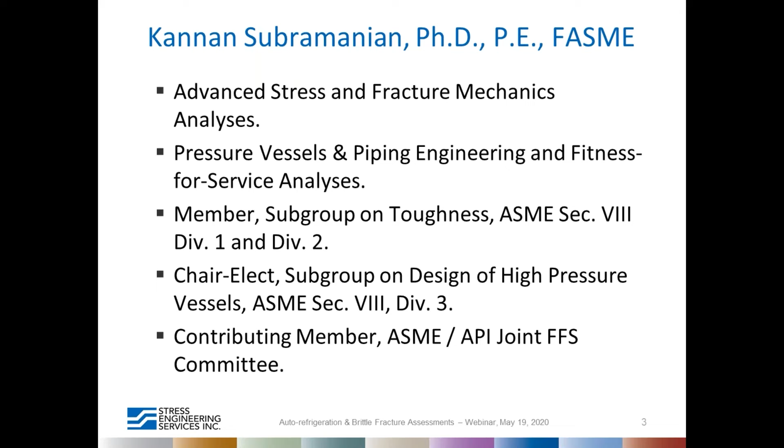Just about me, I have over 17 years of industry experience in various roles as inspector, piping design engineer, and stress analyst, fracture mechanics analyst, and do a lot of pressure vessel design and piping design, fitness for service analysis.

Just a disclaimer here, I will talk about the code aspects at some level in this webinar, but all of those should be taken as my opinion and not as an opinion of ASME or Stress Engineering Services.

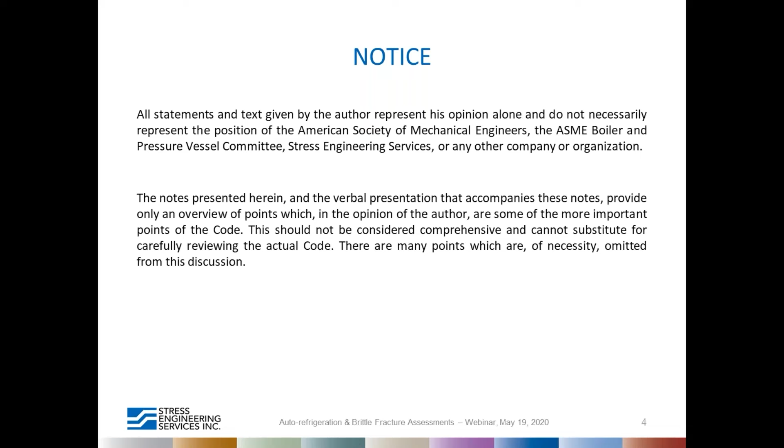So the outline for the presentation today is basically we're going to talk about some of the nomenclature and how does the auto-refrigeration affect the industry, with some examples of events, and briefly discuss the brittle fracture basics and the parameter that has been used quite a bit to characterize the fracture resistance.

And we'll also delve into the details of the code aspects of brittle fracture prevention and how post-construction codes address brittle fracture prevention.

There's one important term that is essential to this discussion, which is the critical exposure temperature, which goes along with the process hazard analysis. We'll discuss that briefly. I wouldn't be touching a lot of details on PHA today because that's a whole new topic that has to be discussed separately.

We'll talk about some example scenarios and we'll go through some example brittle fracture assessments that will be beneficial to the audience. We'll have some closing remarks at the end.

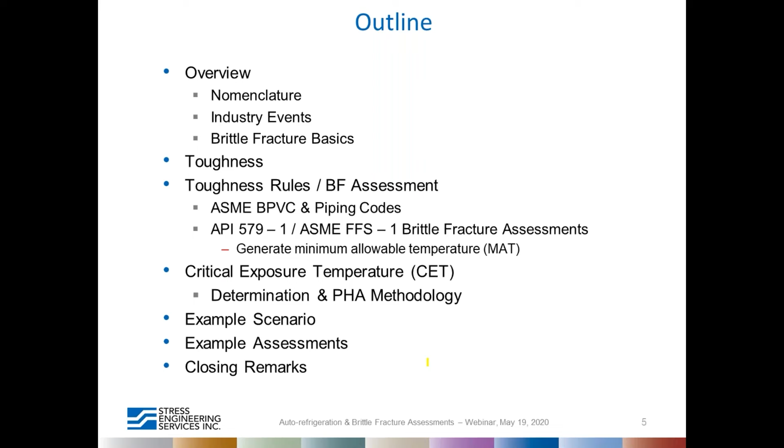So first things first, nomenclature. What is auto-refrigeration? These are all things that get encompassed in what's called the Joule-Thomson effect, which is essentially an adiabatic expansion. In proper terms, auto-refrigeration is the unintentional and uncontrolled phase change from liquid to vapor of a hydrocarbon that results in refrigeration.

This is the refrigeration which, when you don't want it, you get it, and you get it when you least expect it and when you're not controlling it.

Brittle fracture is the sudden and often catastrophic fracture of a material with little or no plastic deformation. Relatively low levels of energy are required to initiate or propagate a flaw.

In a sense, for all brittle fracture assessments, the initiation is assumed to be complete. That is, there's always an assumption that a flaw is present.

And also, brittle fracture is a rapid crack propagation phenomenon through the material and will result in leak. And the leak can result in explosion if there is a hydrocarbon involved, a flammable hydrocarbon involved, and a source of ignition.

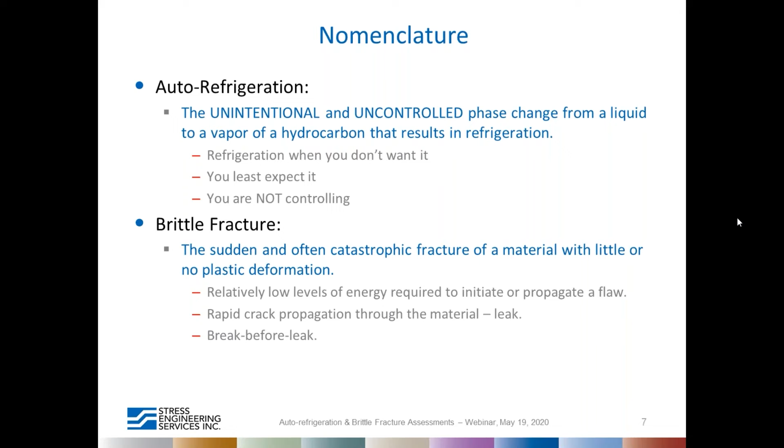This is unlike the other mechanism, which is leak before break. It's the opposite here, break before leak. In some materials, the crack speed approaches the speed of sound of the material, so you can imagine how fast the fracture can be.

Critical exposure temperature is defined widely across various standards, but it is the lowest temperature experienced by a piece of equipment as a result of auto-refrigeration, Joule-Thomson effect, or exposure to cold liquid that it's not designed for exposure to. Low ambient temperature can also be considered a critical exposure temperature in certain scenarios.

Minimum allowable temperature is the lowest temperature allowed at a coincident pressure to ensure the vessel remains ductile. We'll talk about brittle and ductile in a little bit.

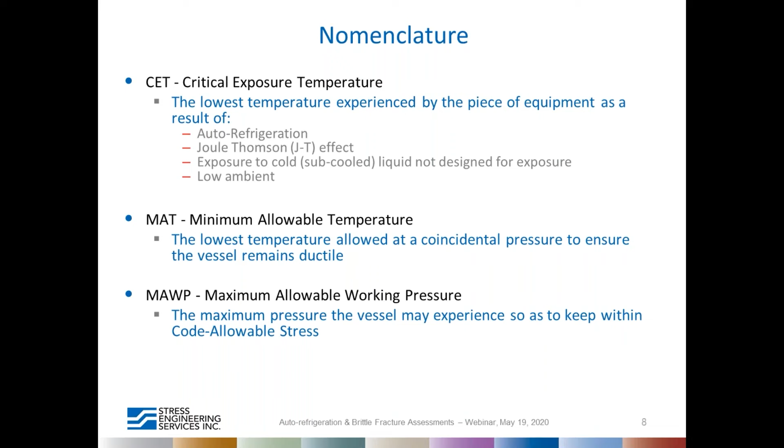MAWP, most of you know, is the maximum allowable working pressure. It's based on code allowable stresses.

Minimum design metal temperature, or MDMT, is a code-specified value developed by owner, or a value determined as part of code design. For example, if you go to ASME Section 8 Division 1, UCS 66 rules would apply unless UG 20 rules apply.

It also equals the MAT at the MAWP, the lowest temperature allowed at MAWP to ensure the vessel remains ductile.

Post-weld heat treatment, everybody knows about this. This is to reduce the residual stresses.

Minimum pressurization temperature is often used by reliability personnel to look at the manageable envelope, the safe operating envelope. The other item related to MPT is MSOT, minimum safe operating temperature. We'll discuss this in later slides.

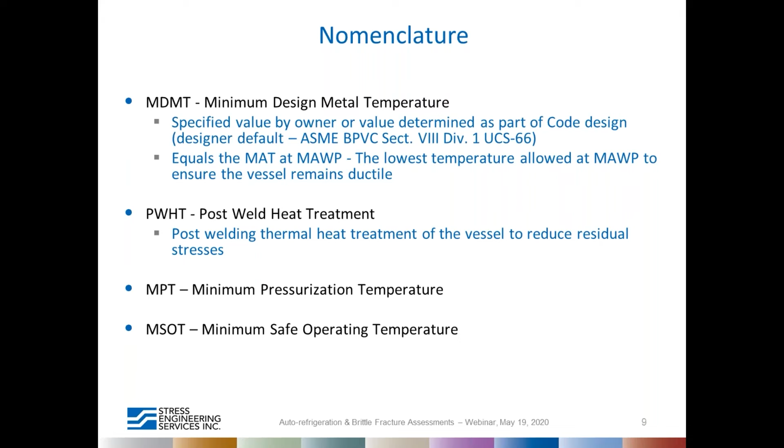I would like to get into the industry events that emphasize the importance of auto-refrigeration and brittle fracture. One of the major incidents is the Morris exchanger failure that involved 2 people getting killed, 7 burned, and 5 disabled. We'll talk about that in detail.

And the other incident is the Lake Charles flare drum failure. Fortunately, this did not result in any injuries. Longford exchanger failure is another major one. In addition to people getting killed, it had a huge economic impact. Beringen is in Belgium.

It's a HDPE plant that had a failure in 1998, and this is at a flange. This issue is still being discussed widely across the industry because of the nature of the material that caused this failure. Many of the flanges supplied since, for over a decade or more, have issues with regard to toughness. So this one was the first incident to that effect that is widely known.

Westlake flare piping, we'll talk about that too later in this presentation. And then there are numerous other hydrotest-based brittle fractures that occur every year. As I mentioned, some of these will be discussed at some length.

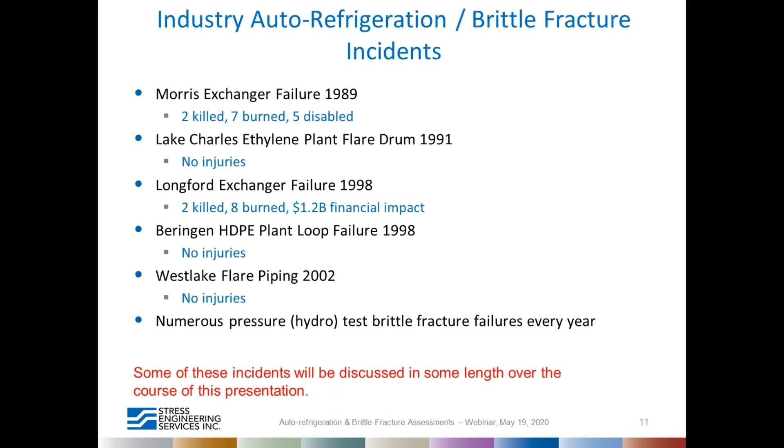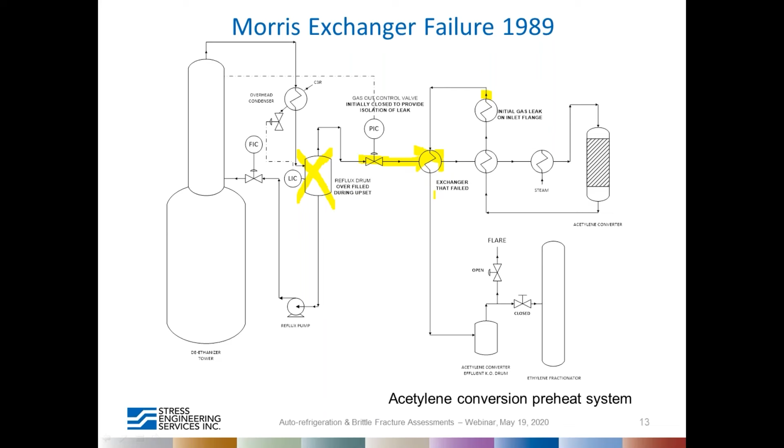So when the plant started back up, the pressure increased, and the low temperature of the material induced brittleness, and the high pressure resulted in this explosive failure. So this was the remains of that particular heat exchanger.

So once again, to emphasize the incidents, it never occurs during normal operation. So we call that an excursion. Normally those are not the things that are designed for, although the code has evolved to address some of those unconsidered cases in the design in recent days.

A process upset of some sort is often the initiator for all these events. Subsequent actions by operators can also cause the chain of events to progress to a much higher consequence. The risk of brittle fracture is transitory, with potential only occurring within a window of vulnerability. Often this window passes without notice. Doing the wrong thing during the vulnerability window can be catastrophic.

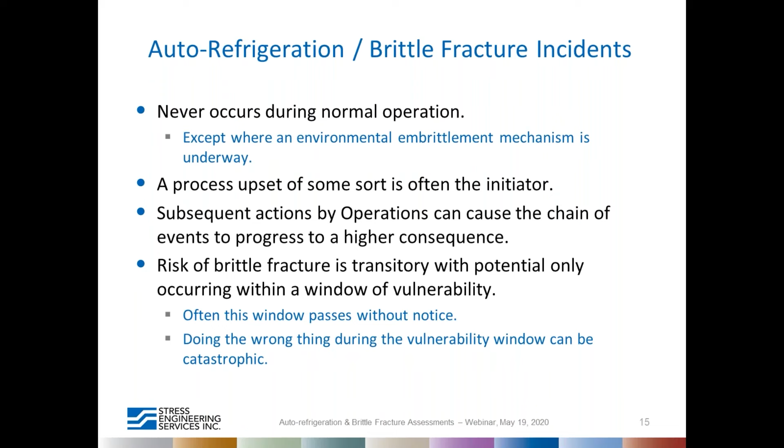Let's talk about some brittle fracture basics. Brittle fracture can be characterized just like in the case of a fire triangle, with a triangle. Some authors prefer to use a quadrilateral. However, these are the three initiators, or the three sides of this element.

One is the crack, or the presence of a notch, and a sufficiently applied stress. Usually the code varies in terms of, as you look through the codes, the number varies from 6 KSI through 8 KSI, which is considered the primary stress that would cause a brittle fracture. So if you operate below that stress, then you're not closing this side of the triangle, because typically the presence of a crack or notch is always considered as present.

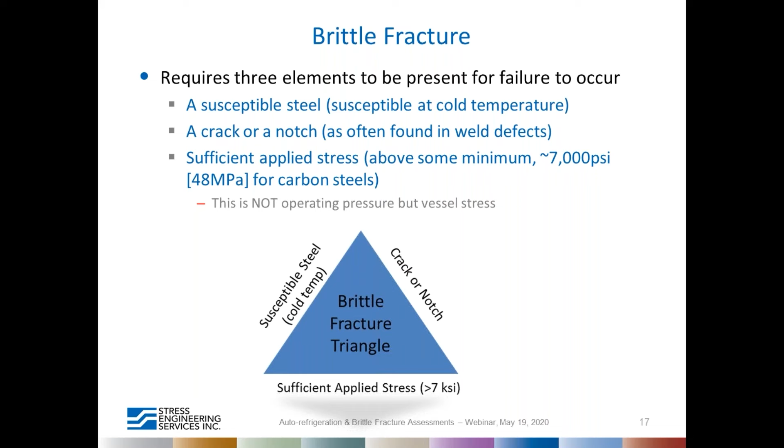The susceptible steel, this is where the material behavior comes into picture, whether the material behaves brittle or ductile. We'll go into that in a little bit. So the same material can behave ductile at a higher temperature and can behave in a brittle manner at a lower temperature.

So this is a curve they call the toughness versus ductility transition curve. This particular location on this curve is referred to as the nil ductility temperature location. This plot is between what's called fracture toughness, which is a measure of absorbed energy in fracture, versus the temperature. As you can see, a material can go to a brittle phase if the temperature goes lower. Brittle materials almost exhibit no energy absorption during the propagation of a crack, but the ductile materials...

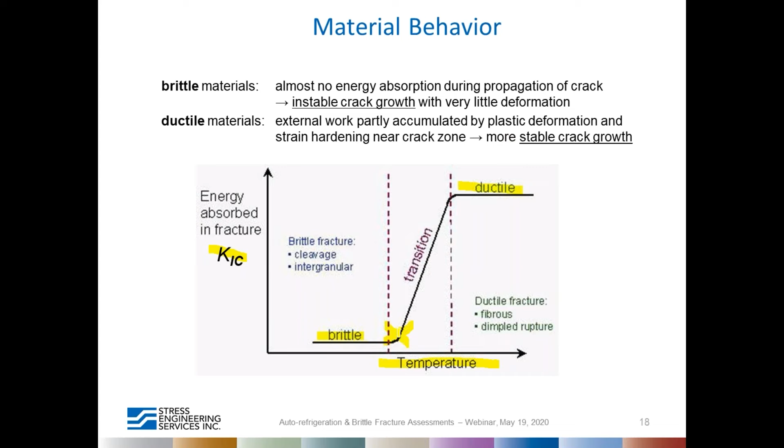When external work is applied, it gets partly accumulated by plastic deformation or strain hardening. So there's more stable crack growth in those cases. Every time a material gets cold, especially carbon steels, it is of concern because of this behavior.

So what is toughness? Depending on the level of academic interest, it can be defined in various ways. In general, it represents the resistance of fracture and is measured by the absorbed energy up to the fracture. Fracture toughness, for most fracture mechanics analysis involving single parameter crack driving, is a property indicative of a material's resistance to fracture when a crack is present.

However, there is another parameter that's being widely considered and researched over several decades. It's called T-stress, which addresses the constraint effect. We're not going to talk about that, although the codes are addressing that at this time.

Typically, this fracture toughness is represented by the term K1C. There are K2Cs and K3Cs. We're not interested in that for this discussion because this mode of failure is the most common mode of failure. Also, this fracture toughness is determined by using the following tests, primarily in the order of their expense.

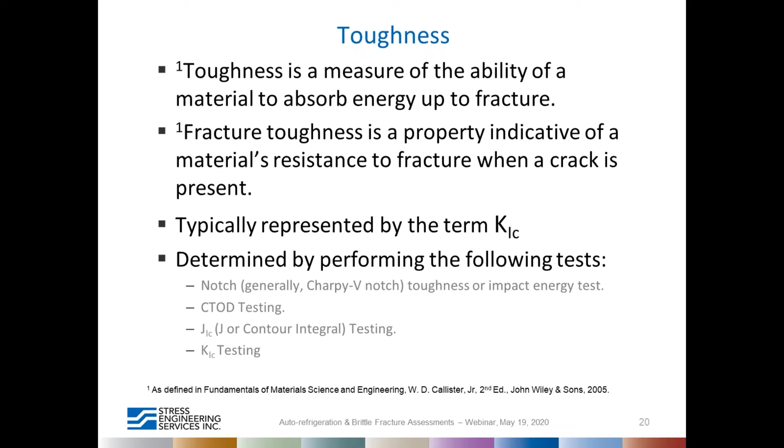The cheaper test is the notch toughness test, the typical one being Charpy V-notch. It is not a direct measure of toughness, although there are correlations that exist that give a clear indication of where the toughness is. There is CTOD testing, also known as crack tip opening displacement testing, and then J1C testing and K1C testing.

We have to also look at the effect of thickness when considering the fracture toughness. For many years, the thickness effect was not considered in the codes. If you look at this graph, we know that the nil ductility temperature, or the brittle to ductile transition temperature, is somewhere here. For a common thin section carbon steel material, that transition temperature is about -20 degrees Fahrenheit. Although for the same material, if the thickness is higher, the curve gets shifted to a warmer temperature. This is one of the reasons why many failures were noticed in thicker sections, and also the primary reason why in high pressure vessel designs, the fracture mechanics approach is involved.

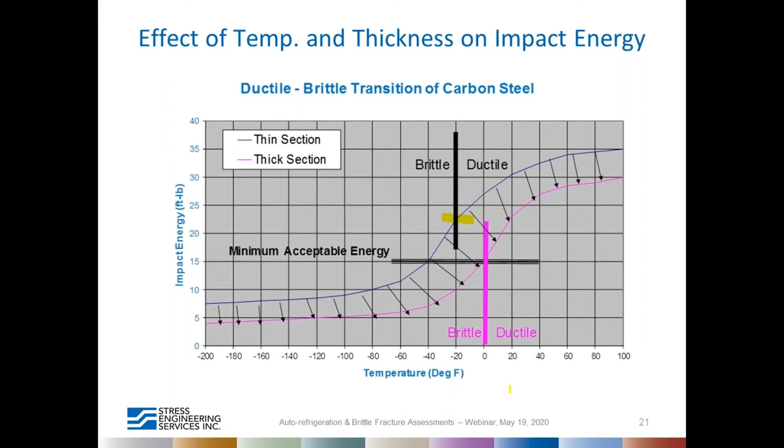In 1981, the Section 8 group formed a task group to address the effect of thickness, which eventually resulted in the current exemption curves involving the function of thickness. Those were implemented in 1987 in the code.

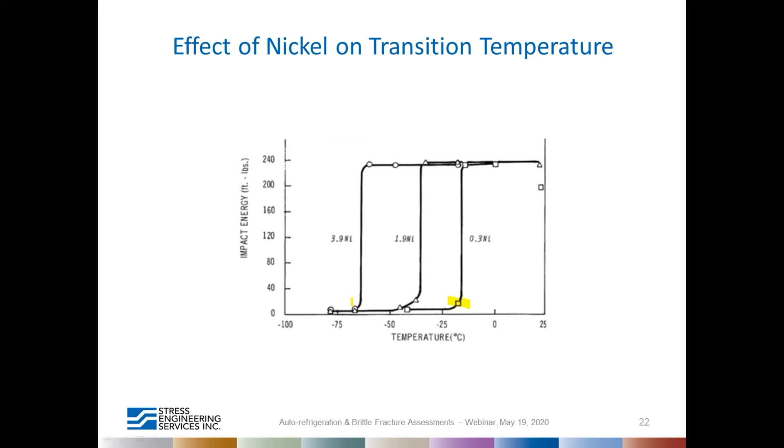Let's look at the effect of nickel on the transition temperature. We know that the nil ductility temperature is somewhere here, and you can see that the addition of nickel certainly helps in reducing that nil ductility temperature as we go higher in nickel content.

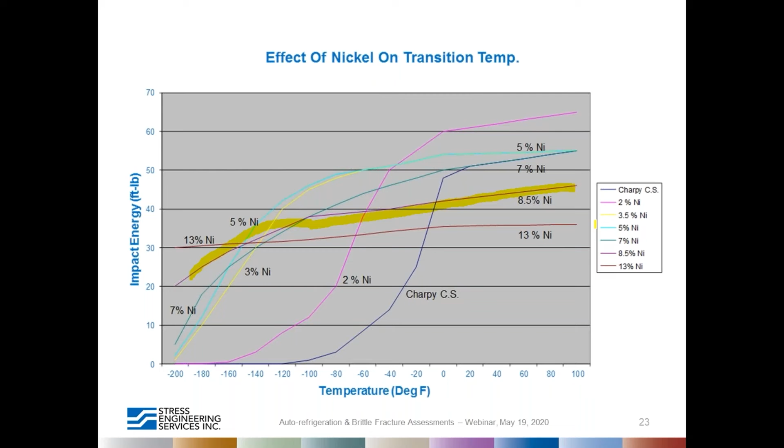Let's look at the processes that are subject to potential auto-refrigeration and brittle fracture. The plants that need to consider this are primarily the olefin plants, gas processing plants, refineries, polymer units, ammonia units, and any light liquid processing units that process C4 to C1 liquids. The primary mechanism here is adiabatic expansion, so topside gas processing also needs to consider this.

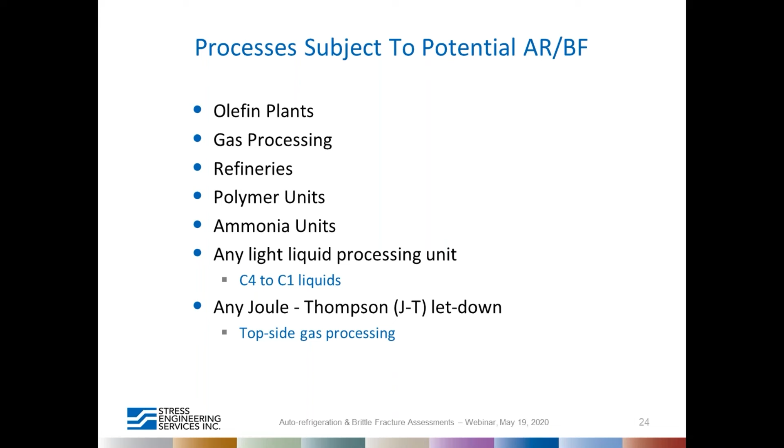So how does the ARBF prevention program elements look like? You have to form a team, then identify the vessels that may be subject to auto-refrigeration, and then execute a brittle fracture analysis, which basically involves developing a MAT curve. Then you can take either the process approach, as shown on the left-hand side, or go to the PHA study that involves developing more accurate CET calculations, then look at the risks involved, and track action items in the PHA tracking system.

So for the most part, we're going to address in this presentation only up to this portion. We're not going to look into these other portions because of the time limitations we have for this webinar.

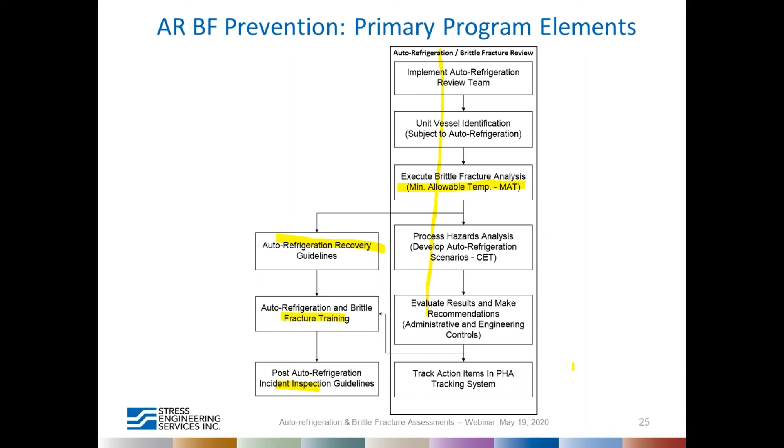So what do the toughness rules or brittle fracture prevention rules say, or where do you find them in the codes? The fracture toughness rules in various codes are given below. In the case of Section 8 Division 1 pressure vessels, it is given under UCS 66. Article M2 if you were to use a previous edition of Div 2, and Section 3.11 in Div 2 in the 2007 edition and later editions.

By the way, 2007 is the major rewrite edition for Division 2. Section 323 of B31.3 also covers the toughness rules. There are only minor differences between Section 8 Div 1 and B31.3 rules. For the most part, they're the same.

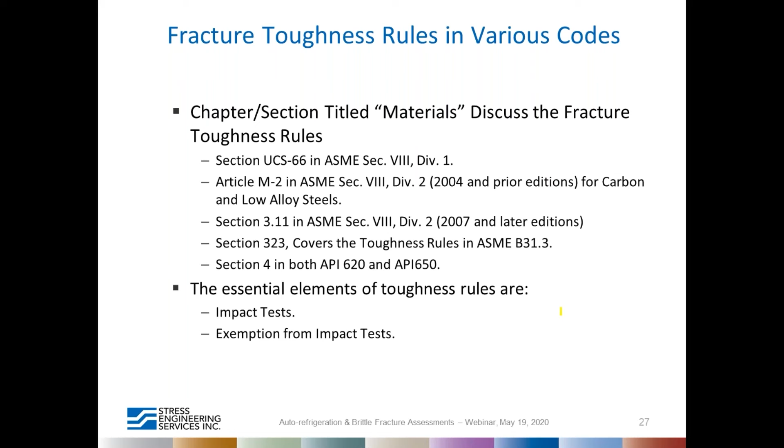Section 4 in both API 620 and 650 storage tank codes. Typically, the storage tank brittle fracture or fracture toughness rules are more stringent than the other code rules. Essential elements of toughness rules are either mandating impact tests or an exemption from the impact test. If you were to impact test something, then you can confidently place them in service for that particular service. However, for exemption from impact tests, you refer to these exemption curves provided in the code, which we will address later.

For post-construction purposes, for vessels or piping that are already in service, we have post-construction codes such as API 579, specifically Part 3 or Section 3 of that standard, which addresses brittle fracture prevention. Note that brittle fracture can be prevented - that's basically how fitness for service addresses this particular damage mechanism. Unlike other damage mechanisms, a brittle fracture event will make or break.

In this process, we generate a MAT curve, and it involves every component assessment in the pressure vessel or the piping. We're going to talk more about Method 2A in this presentation. MAT results are also used to compare against the PHA-developed CETs, and that's how we determine whether a vessel is at risk or not.

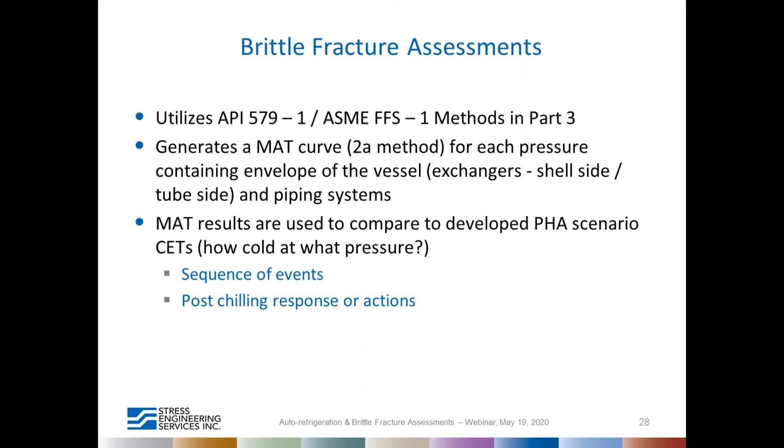Once again, API 579 flowchart of assessment. There are 3 levels of assessment; 2 levels are shown here. In order of complexity, Level 1 involves either impact test or the exemption of it. Level 2 has 3 particular components or equipment in the assessment: pressure vessels, piping systems, and storage tanks. Method A involves developing a safe pressure-temperature envelope. Method B involves hydrotest-based assessments. Method C is basically a proof test, or a flowchart-based method.

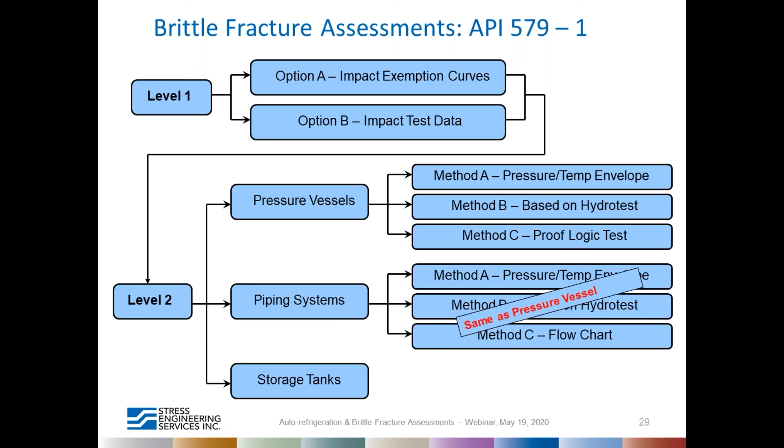So in more detail, level 2 methods involve method A, which has 3 options. You can use either one of them alternatively. Method A involves some level of stress analysis, either using hand calculations for pressure vessels or using complex Caesar models, or piping stress analysis software for piping.

Method B, as I mentioned, is based on hydrotest. Method C is using a flowchart. For piping systems, a simplified flowchart is given on the right-hand side. It goes through a logical process, and you determine whether you're at risk or not. The major modification that came in this flowchart was in 2016, when the CET was lowered to -20 degrees Fahrenheit based on industry experience.

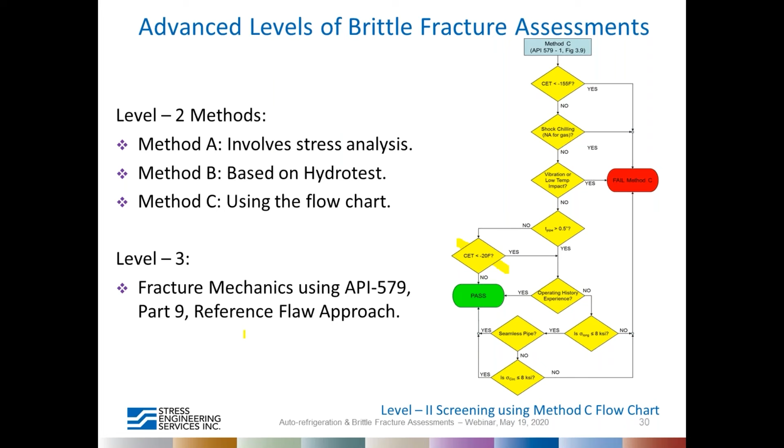Level 3 is based on fracture mechanics-based approaches and typically involves another section of API 579 using the reference flaw approach. Currently, the code or standard uses a quarter-T reference flaw, T being the thickness of the component being assessed. It might change in the future.

And further reduction in MAT. The MAT we talk about here is the MAT that is developed either based on impact test or exemption curves. We'll get to the exemption curves in a bit, but that MAT can be reduced further for taking credit for operating at a lower stress.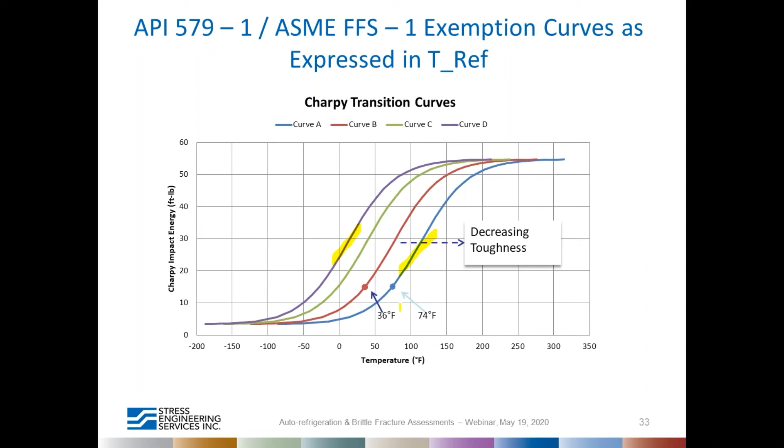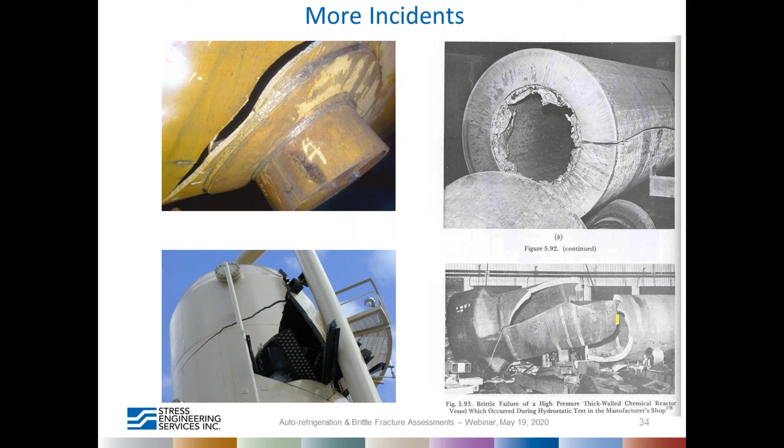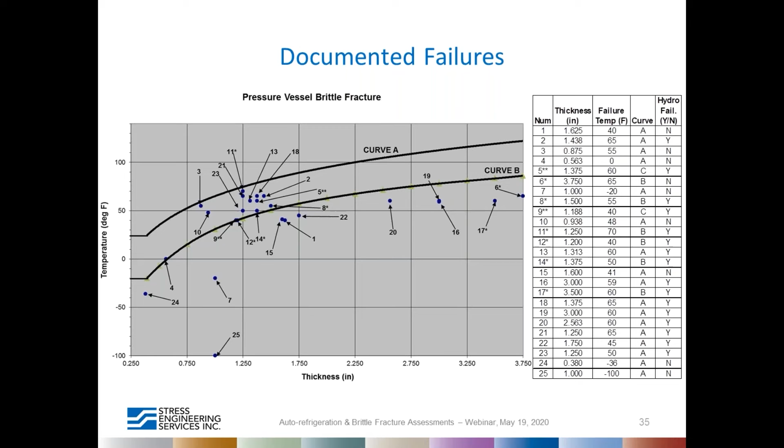So basically, most of the failures that are still happening are in hydrotest. Let's go into the details of the MAT curve.

So what is a MAT curve? If you were to do a simple post-construction brittle fracture assessment for an excursion event at a particular pressure and temperature, the MAT is a single value. However, if the pressure varies and you want to consider the risk involved for a particular pressure vessel operating at various pressures and handling a particular olefin, then you need a MAT curve.

On this graph, the blue line shows the MAT curve and the red line shows the flash curve, or CET curve, of the hydrocarbon or olefin. The flash curve indicates that if you're below it, you're in the liquid phase, and if above it, you're in the gaseous phase. If the MAT curve falls below this curve, you're inherently safe to operate, meaning failure is not predicted. This is for one particular example of a material, wall thickness, and pressure considered, with propane as the olefin for this example.

Just to recap how this is developed: you do the stress ratio calculation at each pressure, and then you do the temperature reduction at each stress ratio, and plot and develop this plot of minimum allowable temperature.

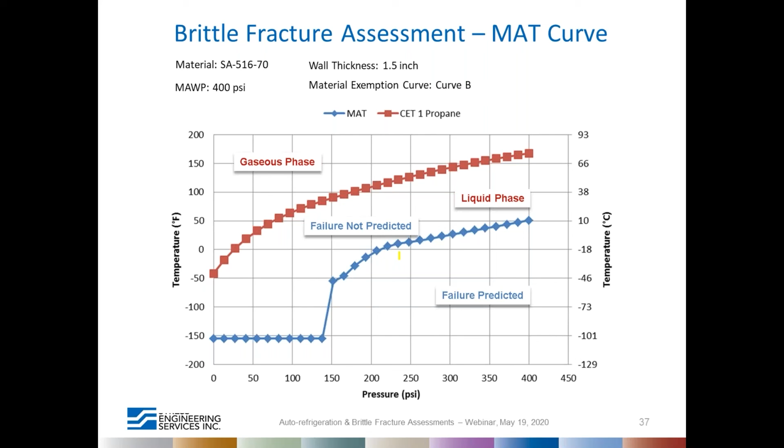So one example would be looking at this. How is it applicable to the industry? For example, this MAT curve is plotted for one particular vessel that's operating at 180 psi at 90 degrees Fahrenheit, and the operating medium here is propylene.

If you look at the flash curve, which is above the MAT curve in this case, let's consider one scenario, a one-step auto-refrigeration. You operate at a normal operation pressure, depressurize it, and then repressurize it at this pressure. The metal temperature remains the same, so as the pressure increases, you're increasing the risk of brittle fracture. However, while the MAT curve is still below this horizontal line, the risk is minimized.

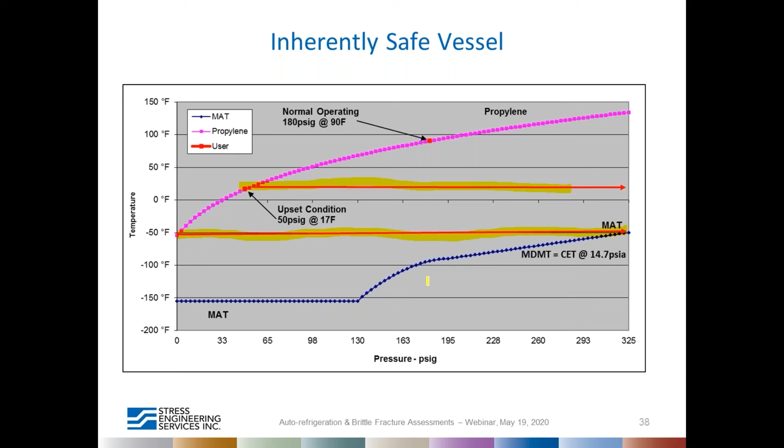In the other scenario, where you go all the way and de-inventory, the pressure goes all the way to zero, and then you restart, the metal temperature is very low at this point, and yet if you repressurize it, you're still above the MAT curve. So this is an inherently safe vessel, and this is how you would do a process safety or process hazard analysis. Let's look at another vessel.

In this case, the medium is propylene. Once again, the operating pressure is 180 psi and the temperature is 90 Fahrenheit. And the MAT curve is a little different than the previous one, so this is a different vessel.

Once again, if you're operating at this pressure and temperature, you're safe. And when you go along the flash curve and then come back and want to restart, once again you're safe if it is rapid, without returning to equilibrium.

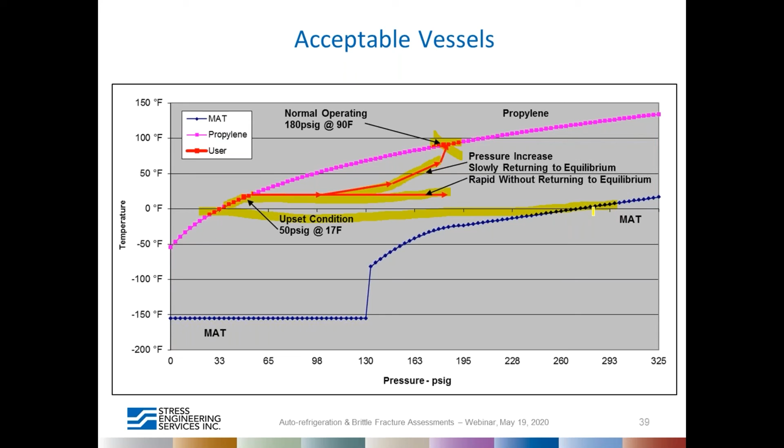Our typical process restarts would involve a slowly returning to equilibrium scenario, and the process should place controls to consider these upset conditions, because if you go below 17 degrees Fahrenheit on this curve, and then come back, you would intersect this MAT curve, which will put this vessel at risk.

So critical exposure temperature, this is very essential to determine accurately. It is determined based on startup, which can be the lowest one-day mean ambient temperature, normal operation temperature, shutdown, or any other upsets, or standby when not in operation. And it can be from hydro test as well, and also auto-refrigeration and other Joule-Thomson cooling mechanisms.

Shock chilling is another one, when you introduce cold fluid into the system to cool the system faster to restart. And these are determined using PHA, which is the process hazard analysis, or other comparable assessment methodologies.

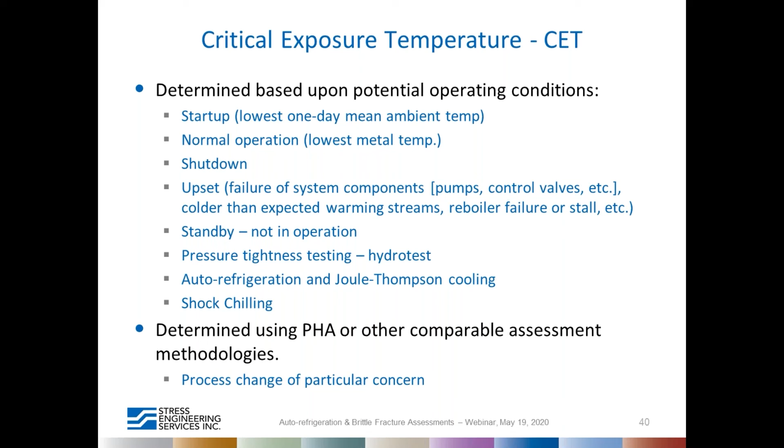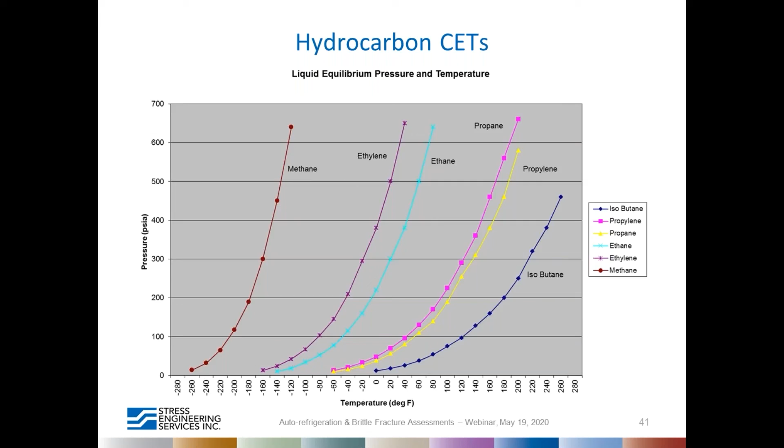So this is probably a repeat of the previous slide I gave earlier. However, some points need to be considered here which were not discussed earlier, because this is part of the PHA, so you have to consider the PHA techniques such as event tree, guide list, and black box. These can be part of a next discussion that we may be able to provide, but they are not discussed here due to time constraints.

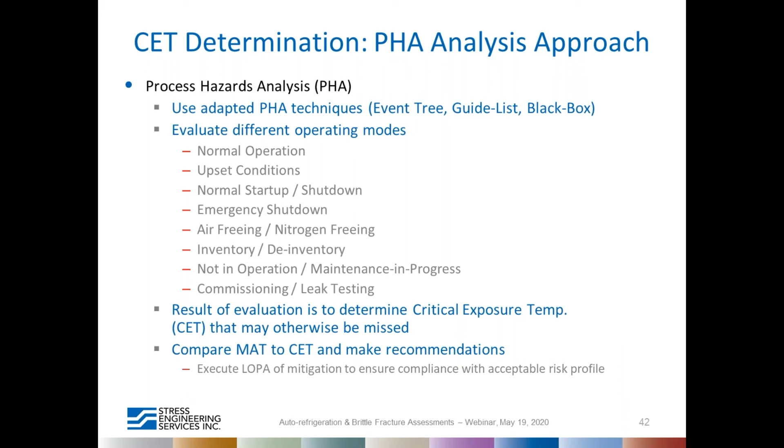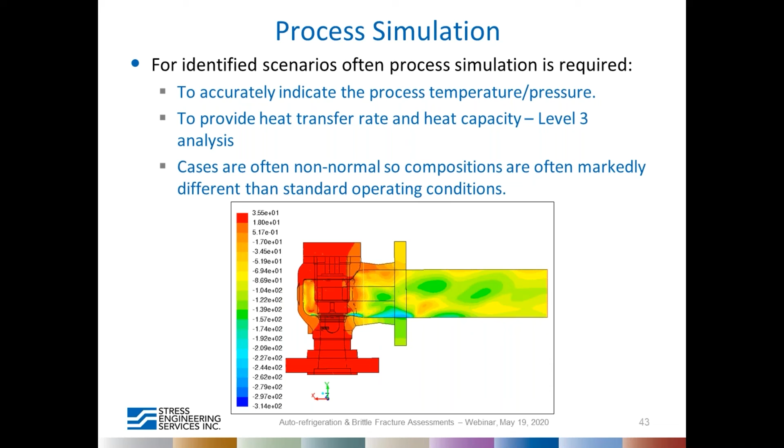Once again, there are many tools available to determine the CETs. Sometimes it's easier to determine just using the flash curves, and also changing the mixture of the composition and determining it. Some of the tools available to determine the CETs are HYSYS and a few other tools. In some cases, it is hard to determine that, so you may need to perform actual computational fluid dynamics analysis, such as this one here, where a relief valve is subject to a depressurization scenario.

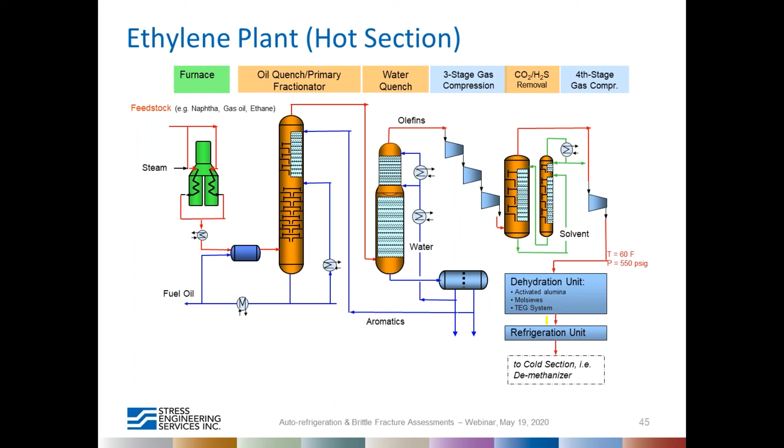So one example that would be applicable for a real life plant would be to look into an ethylene plant. The ethylene plant has a hot section where you have the quench primary fractionator, water quench, CO2, and hydrogen sulfide removal, and then you go to this colder section, which is after the refrigeration unit. The cold section here will have several towers: demethanizer, deethanizer, C2 splitters, and other de-olefinizers, basically. Now let's look at one particular.

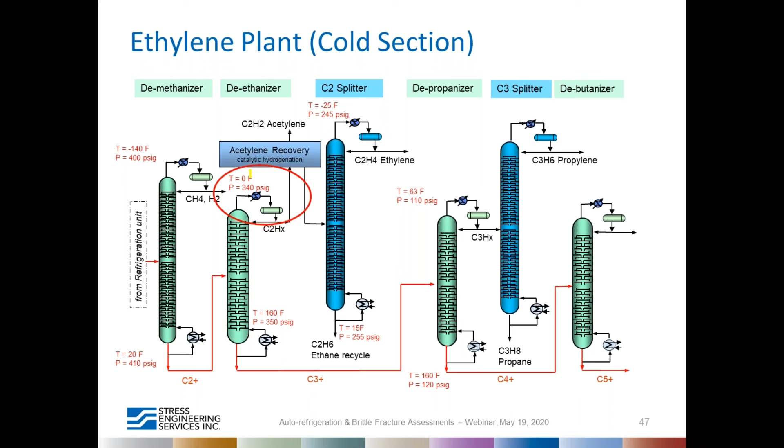In some of the vessels, there may be different materials of construction from the bottom to the top, so you may need to develop different MAT curves for each section. Let's look at one particular example here, one particular vessel. This is a drum that's operating at a pressure of 340 psig and a temperature of 0 F. Let's look at the MAT curve for this vessel.

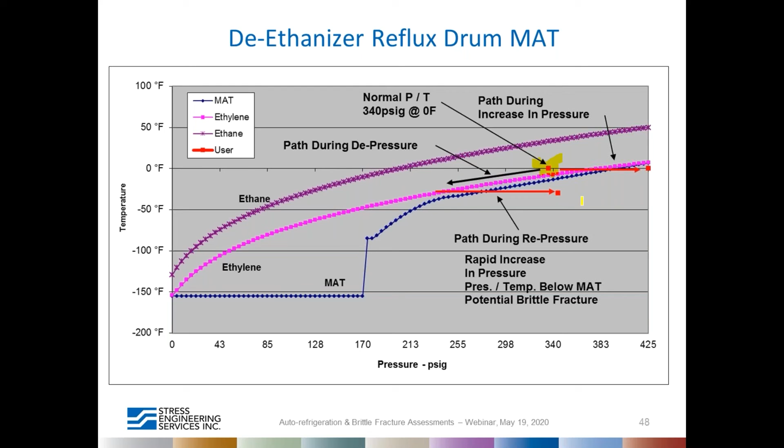The essential reason we are discussing this in more detail is that the most recent standards are pretty thorough, in the sense that most of these scenarios are being listed as potential brittle fracture scenarios. However, previous editions of the code do not list many of these scenarios or excursions, and most of the pressure vessels operating at this time were put in service several decades ago.

Let's look at one example. In Section 8 Division 1, it did not include serviceability under low temperature excursions such as auto-refrigeration until 1999. The code included thickness-induced effects in the exemption curves introduced in '87. That was one major change, and then we had a few more changes in the following years.

And B31.3 did not have many of those items listed until 2002. However, the exemption curves were introduced earlier. Regardless, the toughness rules are used in developing a safe operating envelope for pressure vessels, and those curves are used to control or eliminate the process risk to prevent brittle fracture failures.

In the case of ammonia bullets, like the one shown here in this example, auto-refrigeration and brittle fracture hazard is primarily a potential issue. In this example, the primary objective is to address auto-refrigeration and brittle fracture hazards with the operation of the ammonia feed systems.

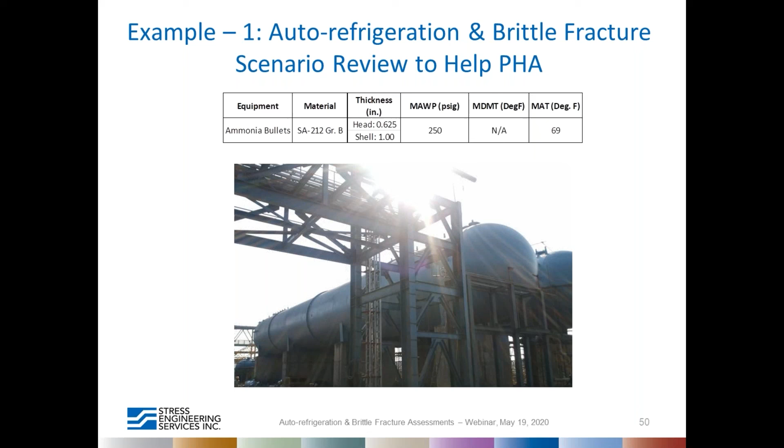If you repressurize it to the PSV set point, then the vessel is not at risk. However, if you go to a low temperature interlock where the pressure is 99 psi and the temperature is 65, you are at risk of brittle fracture. This illustrates how important it is to develop a MAT curve and look at it from the standpoint of process hazard analysis when the vessel was not designed to address these concerns.

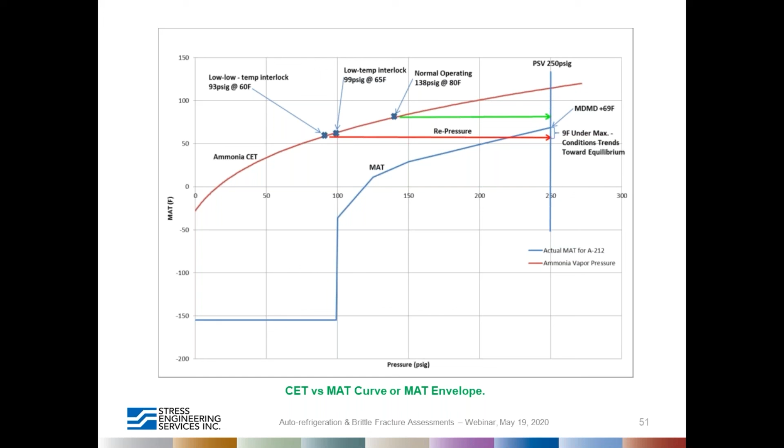The other incident that happened was the Westlake flare piping incident. Fortunately, this one did not involve any injuries. In hydrocarbon service, there have been several flare line ruptures. Therefore, it is something each ethylene plant should review, particularly at every revamp or expansion.

Once the flaring in this particular scenario began, once the flaring of ethylene began, the cold flare drum here, the cold flare drum overhead line experienced low temperature at some point, and that low temperature was not recognized due to faulty instrumentation.

Now, this resulted in the failure, but the investigations done on the failed material indicated that the material did not meet the required Charpy energy, and the failure was at an elbow, and elbows are typically highly stressed locations in a piping system.

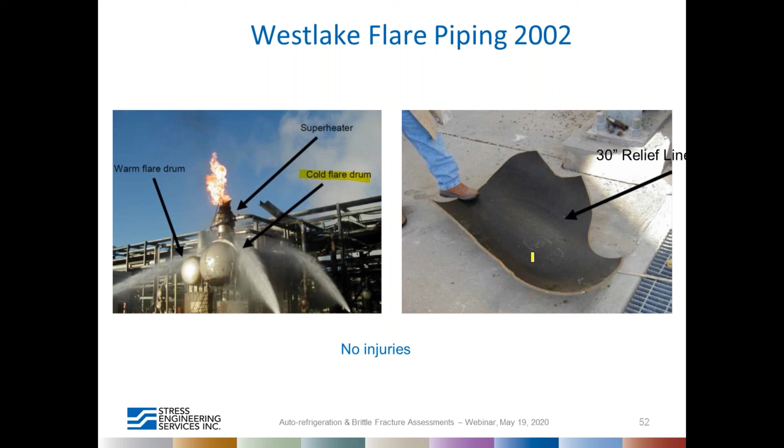Regardless, flaring is a common phenomenon, and relieving is a common phenomenon happening both in topsides and downstream and other operating facilities. So how do you address such a relieving scenario or a flaring scenario?

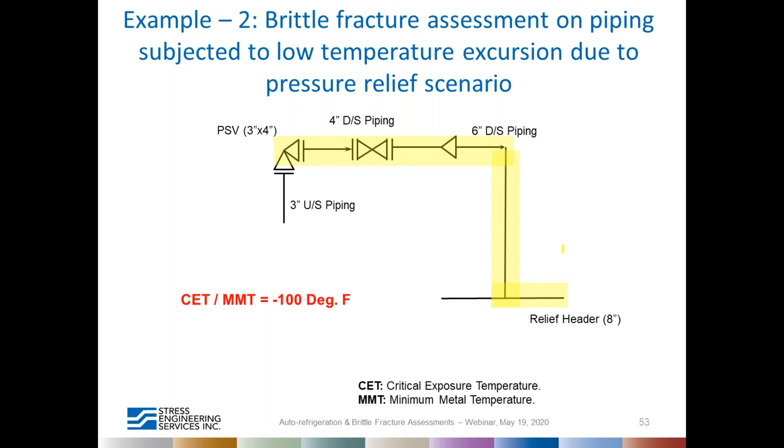So there's a PSV here. This is an example problem involving a piping system, and then there's a downstream pipe. In this case, the CET was established to be -100 degrees Fahrenheit, and you run it through the level 2 assessment procedure. The easy assessment would be method C, which involves the flow chart.

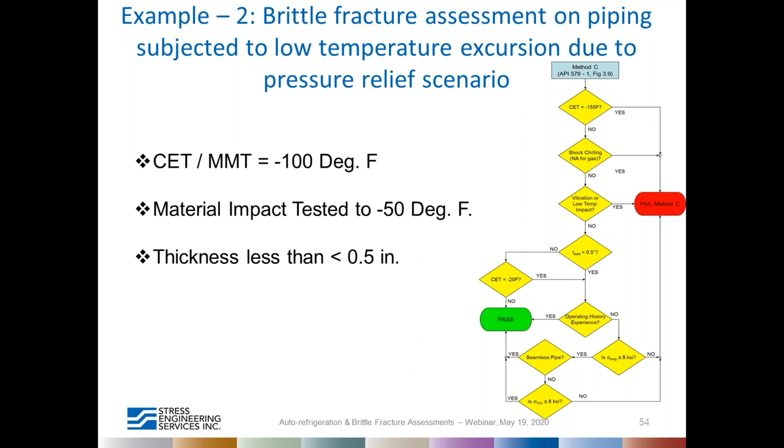However, this material, even though it is thinner than half an inch, does not qualify through method C. So one has to do either a hydrotest-based assessment or a stress analysis-based assessment.

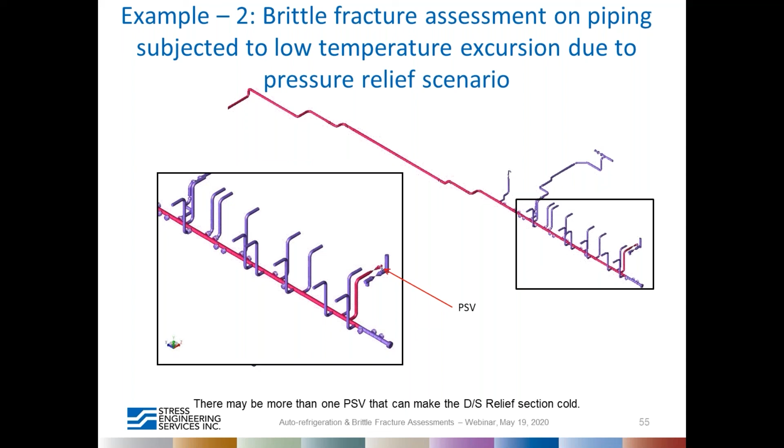Using stress analysis, you can model the system and then come up with the stress ratios and temperature reductions. Once again, API 579 or the design standards say that you have to consider every component and check to see if every component passed the assessment.

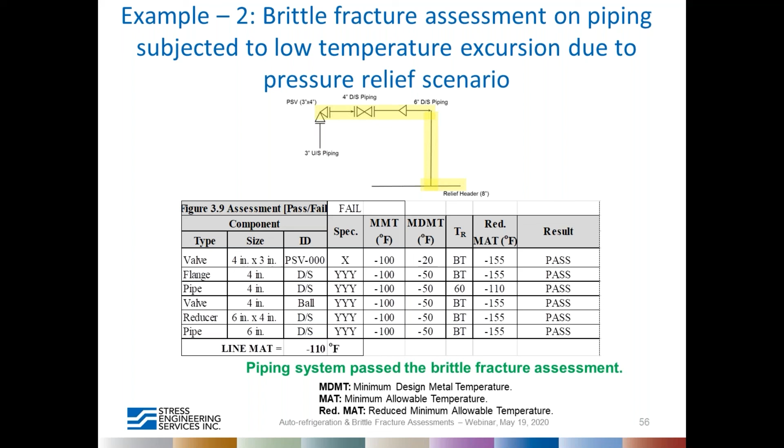So every component in that system is listed here, and it is compared against the minimum metal temperature or the CET. This is the original MDMT for that material. It is mostly impact tested, and the reduced MAT based on the level 2 assessment is shown here. For this example problem, this system passes because it is operating at a lower stress.

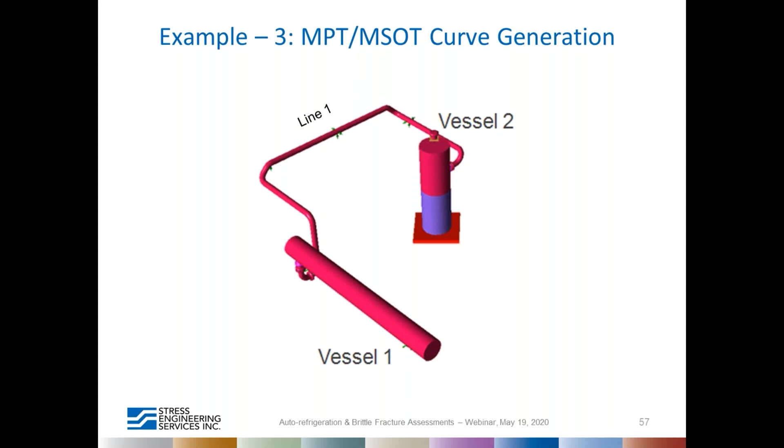Oftentimes, reliability engineers would like to do analysis with MPT, the minimum pressurization temperature. It is a safe operating envelope, easy to develop for pressure vessels. However, for piping systems, it is a little complex in that it involves a lot of iterations. Regardless, one such MSOT curve envelope is shown here.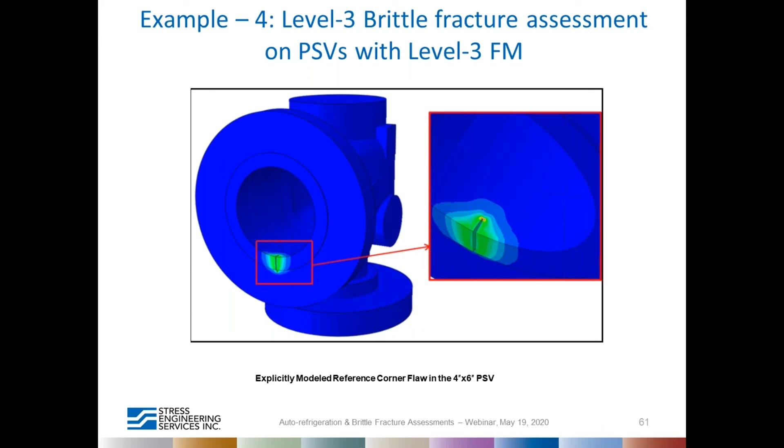So the complexities are there. However, solutions are provided in the standards to address any kind of complexity. Now, there's another issue I mentioned earlier regarding the Beringen, Belgium plant flange failure that resulted in a lot of discussions across the industry about forged flanges, the A105 for example, about their quality and usability. There have been a lot of studies on this.

This one example is where a particular low toughness flange was being subjected to bolt preload and operational loads stemming from Caesar or piping stress-based analysis, and looked at the MAT curve based on data available from Charpy tests across the board. The MAT curves were developed using a pure fracture mechanics approach for various fracture toughnesses, giving a lower bound, a median, and an upper bound, depending on the data available.

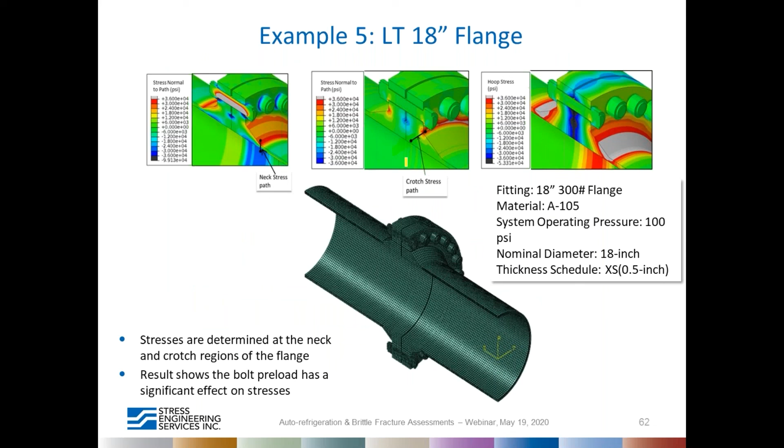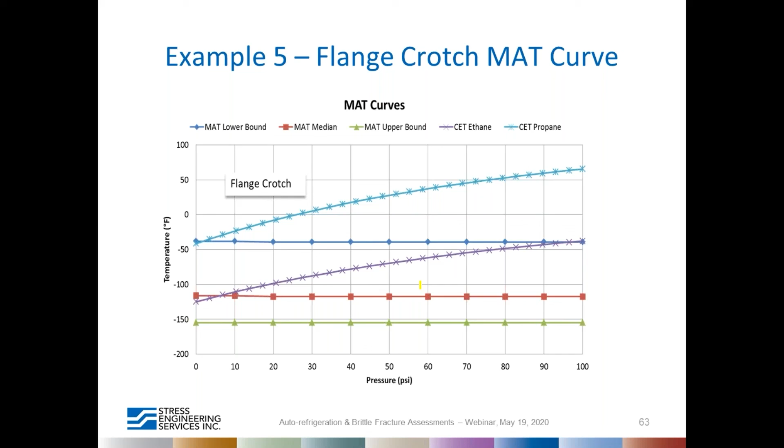That would be the end of the discussion, and the concluding remarks are presented here. Basically we covered: do you have MATs for all your equipment subject to auto-refrigeration or brittle fracture? And have you utilized the equipment MATs in your PHAs? Again, this is because most vessels in operation are old and may not have been designed based on the most recent rules that require one to include scenarios such as auto-refrigeration or low ambient temperature.

The third point: ARBF is a real process safety hazard and can have significant process safety risk. We covered the risks involved, evaluating vessels and piping for fitness for service using advanced methods, and we briefly touched on PHAs, requiring detailed documentation of vessels, MATs, and PHA findings.

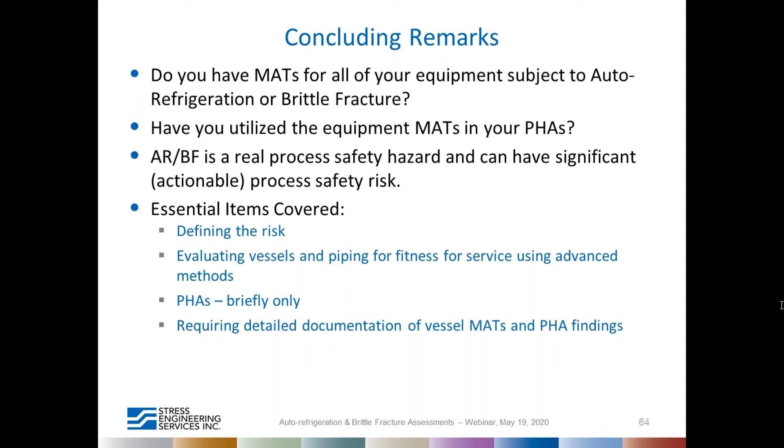With that, I conclude my presentation, and thank you for being patient in listening to this conversation. I open this to any questions at this point.